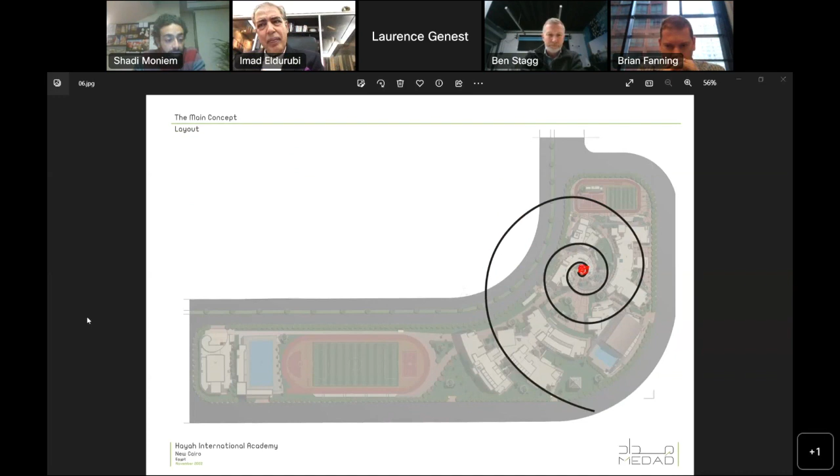So this is the volute, and on the eye here we put the theater of the KG stage. This is the start of the process of teaching and learning in the theater of the KG building, as it's an outdoor space, very intimate and open to the sky, to say that the limit is the sky.

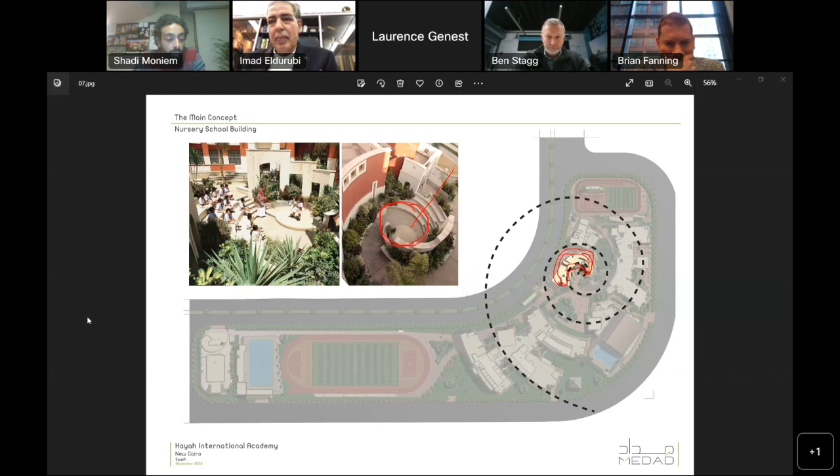Then we put the KG building here in the middle, next to the eye. Then we go through the journey, we put the elementary building here. Then when we go further than the eye, we put the mid and high school building here.

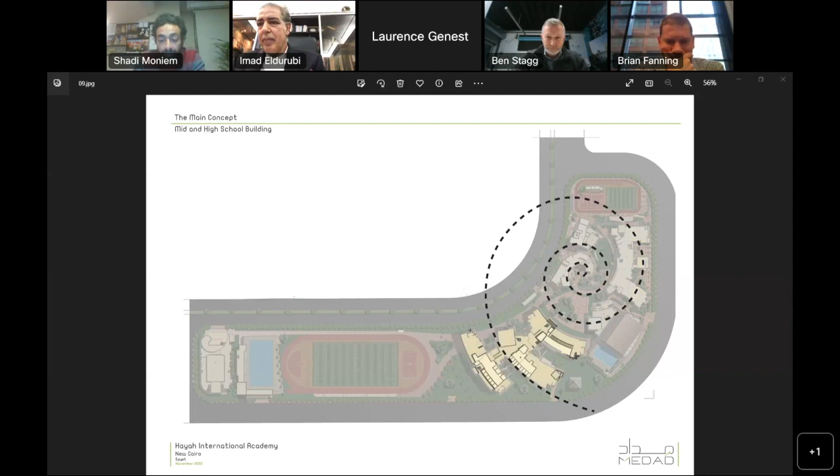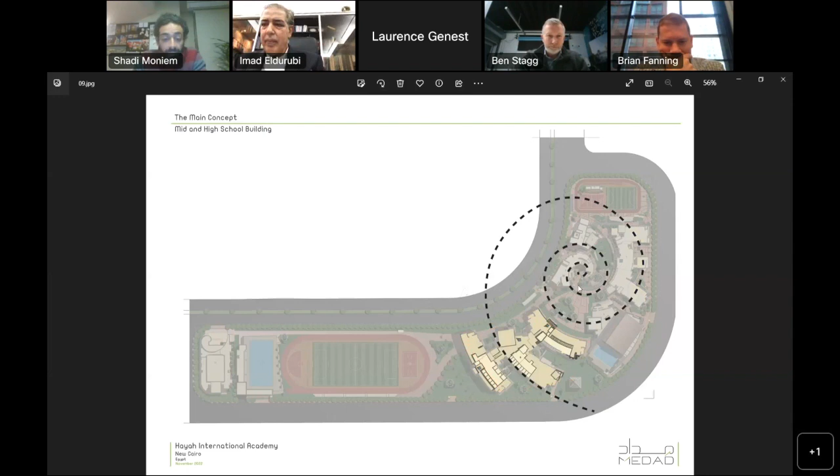So that was the main concept that we used here. And then when we talk about the codes, the buildings itself will face the rules and the items that we need to respect and follow.

There are a lot of codes here in Egypt to follow: the firefighting code, the special needs code, the car parking code, and more. But we chose the firefighting code as it will affect the building the most, it has the bigger effect.

Here are some of the items that we need to follow and respect. When we talk about the firefighting code, we need to know the function of the building we are designing as we go through the design process. In this case, it's simply an occupancy group under the subgroup schools and colleges. This is a very important piece of information we need to know, because it will affect the other data we need to know in the code.

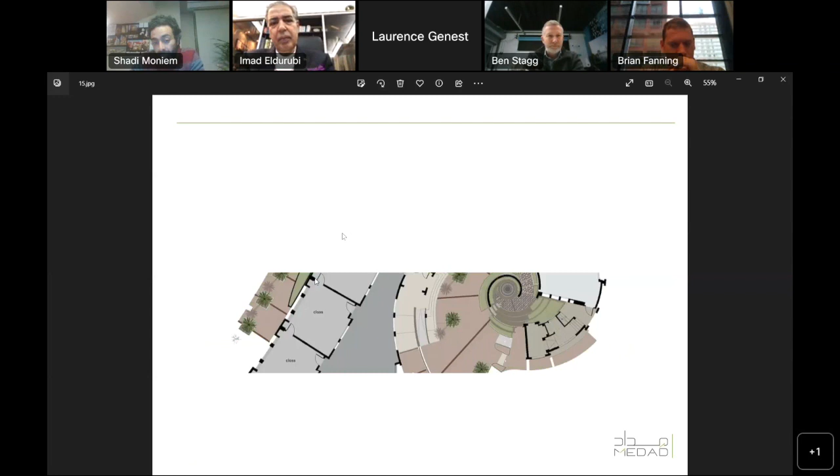So when we applied it, we designed the nursery ground floor building. This is the ground floor of the nursery building, and as we see, it's complying with the main concept.

We don't forget the main concept - the main concept is the volute. Why the volute? Because it represents the growing process of the journey that the kids go through as they go through the journey of learning.

So here is the theater I talked about, and this is the building of the nursery, and it's respecting the curves of the volute here, which is why the curves here are harder than the curves in the other buildings.

And we put the 2 exits we need here and here, and they apply with the function, they apply with the main concept. They are not odd or out of place - nothing is ugly or anything like that.

This is the ground floor, and we can see it also on the first floor here. The distance between the two exits didn't exceed the 100 meters travel distance we talked about, so there is no place in the building more than 50 meters away from the exits.

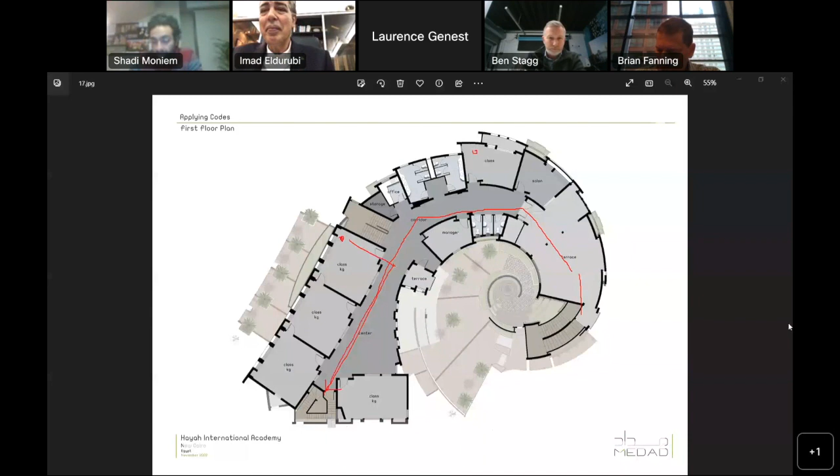And we put them at the end of the building, so they cover the whole building with no problem. We also placed them in locations that don't affect the elevations and the north-facing side, because this is a school, so we need most of the classrooms directed to the north.

So when we chose the placement on the plan, we didn't affect any of the function or the main concept.

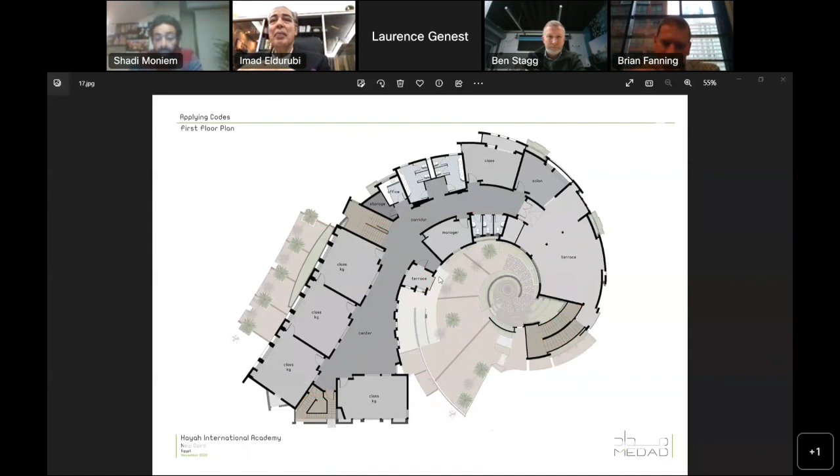This is the stair we are talking about. And when we are dealing with the stair, we are dealing also with the masses of this stair. It's not just a stair, it's a feature. It's a mass.

We can put a lot of elements and make it an identity for the building. Every stair of the different buildings, we are dealing with it as its own identity for that building. So even if the kids are seeing this element, they know that this is for their building.

And for the other building, we are dealing with the masses with other elements. So it's different, but homogeneous with the masses of the whole school.

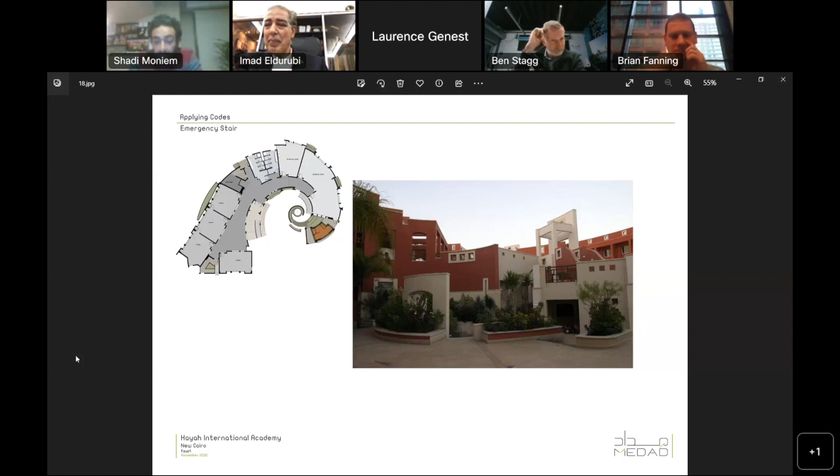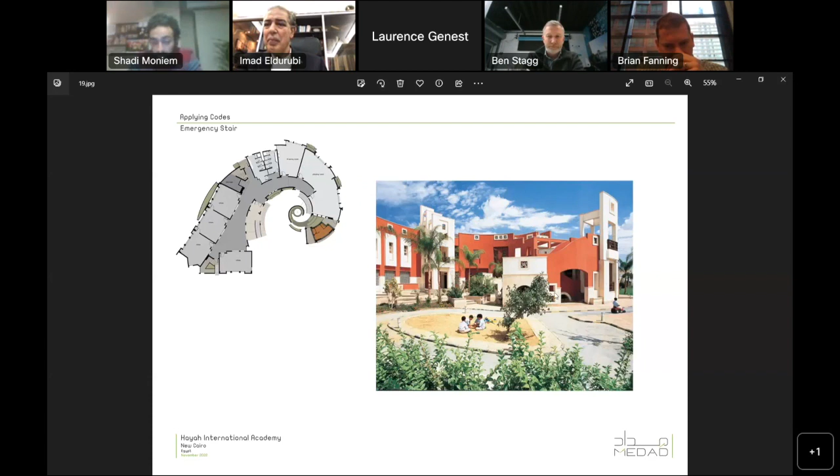So here we can find a picture for the stair that we are talking about. Here is another shot for it from the real course, and this is the other one.

So we can see that the stair is not just an element we need to enforce in the building, or enforce in the plan or in the mass. We deal with it as a beautiful element we need to express a lot of things with.

And that's it for me. I hope that was doing well with all the people here. And thank you for this opportunity again.

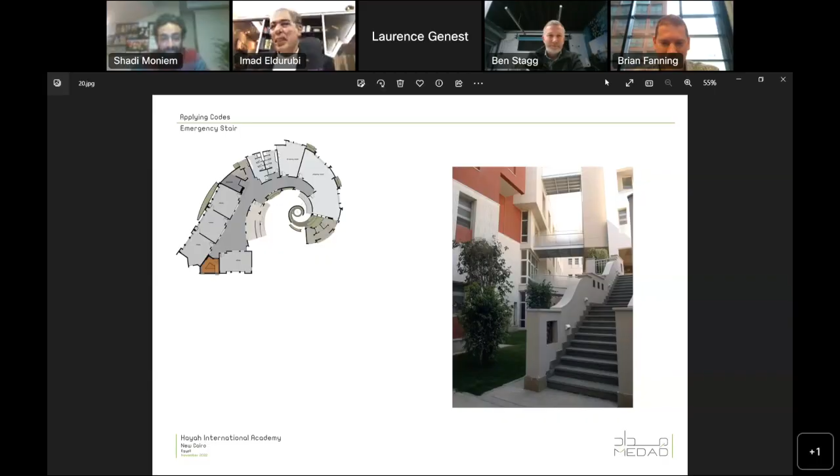Thank you, Architect Shadi, for shedding some light on the Hayah Academy. I believe there is going to be another campus on the other side of Cairo. This one was built in the Tagammo, the fifth settlement, but I think you're working on a different project across on the other side of the Tagammo, is that it? Yeah, yes, we were doing a lot of other projects, educational and retail and administrative buildings, alhamdulillah.

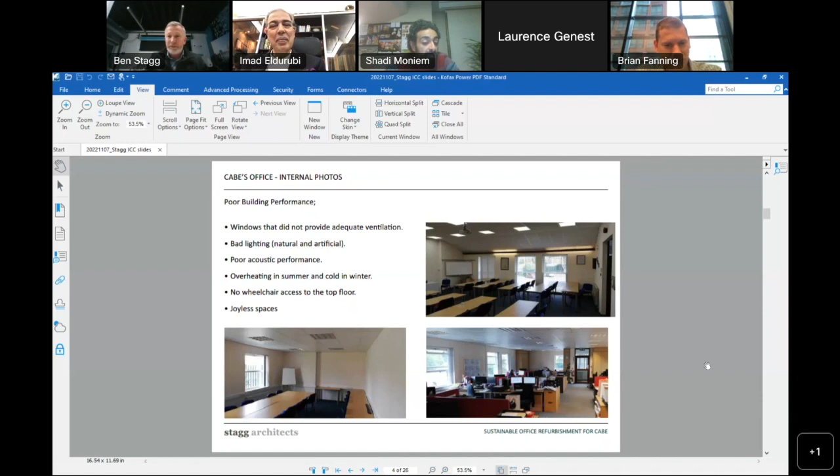If you look inside, the windows had been replaced once in its lifetime, but were of very poor quality. People simply couldn't open them, and they were drafty. The lighting quality and colour temperature was very bad, with flickering lights, which made it uncomfortable. The acoustic performance was very bad, with a lot of reverberation, making many spaces uncomfortable. It suffered from overheating in summer, very cold in winter. There was no wheelchair access to half the building because there was no lift. It was just a very joyless building that hadn't had much love given to it over the years.

The brief from CABE to us was to improve on its compliance under the building regulations. As an existing building, they weren't obliged by the building regulations to do a lot to it, but they were keen to go beyond their minimum standard and really be exemplary in terms of implementing best practice, so they could demonstrate to others that they were doing this too.

So we were looking to focus on improving comfort through better ventilation, heating, cooling, lighting and access. They also wanted this to be an exemplar sustainable project, embodying important principles of retain, reuse and recycle. It needed to be a welcoming place for staff and visitors, and of course, everything had to be done to a very tight budget, since they're an industry organisation that needed to demonstrate to their members they're spending money sensibly.

So the key moves we made in the building - this is a cut through of the ground floor. We introduced a new lift shaft to give access to the first floor. We carried out some opening up work, structural alterations to the reception and lounge area, which was previously a very cellular layout, making it rather unwelcoming. So we opened that up so the spaces flowed through.

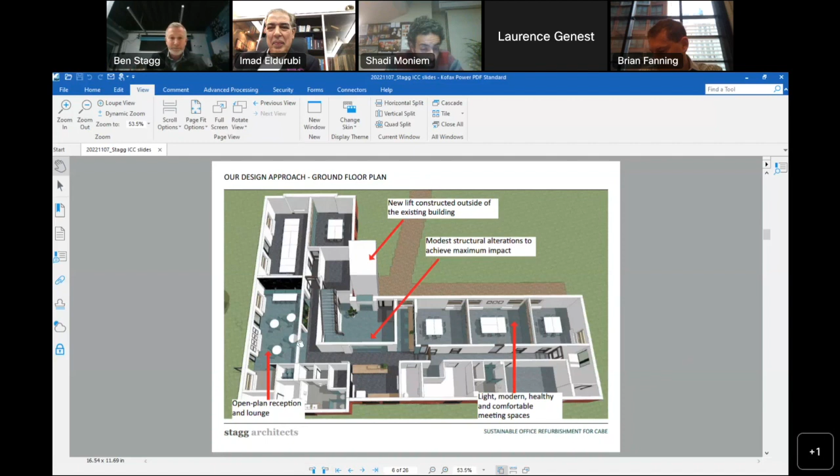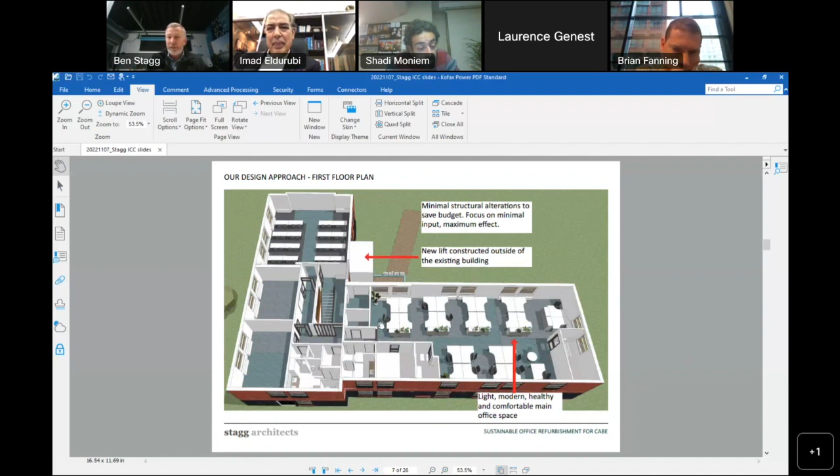But these were modest alterations because budget was always a key consideration. On the first floor, there were very few structural alterations - some were needed where the lift comes up in order to get access throughout the building. Otherwise, it was very much a case of improving comfort for the people working there.

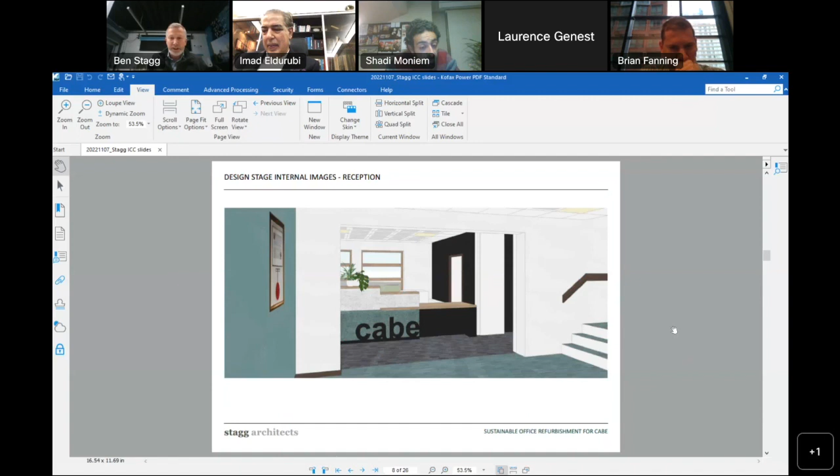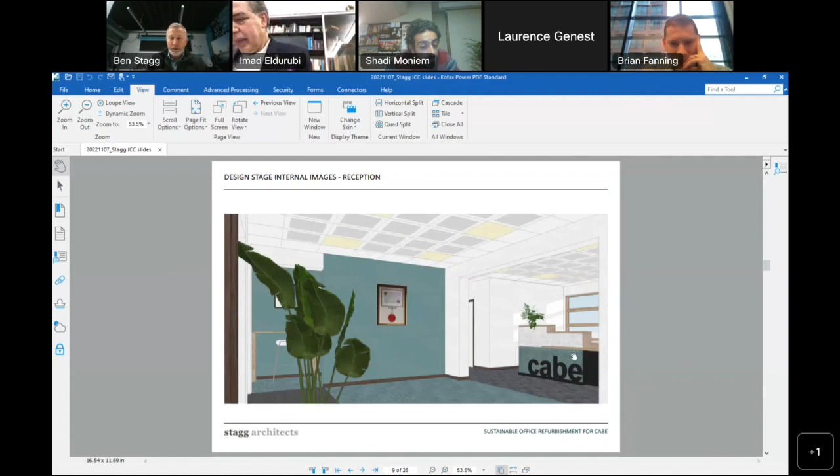I'll take you through quickly some visual illustrations we produced at the design stage, just giving the client a simple understanding of what we were doing. So this is the reception area - opening up on the right, you can see through here. Previously, this was all closed off into rooms.

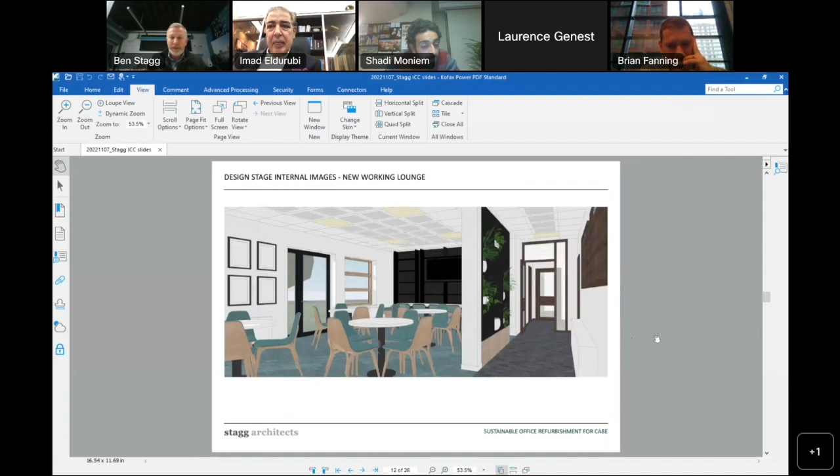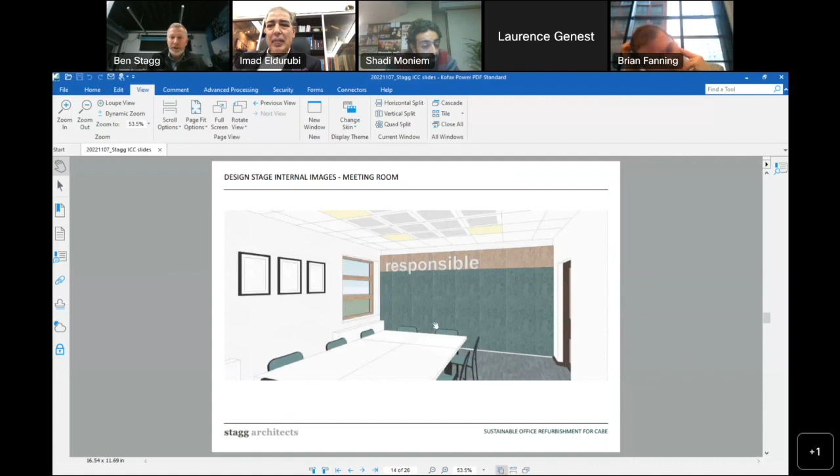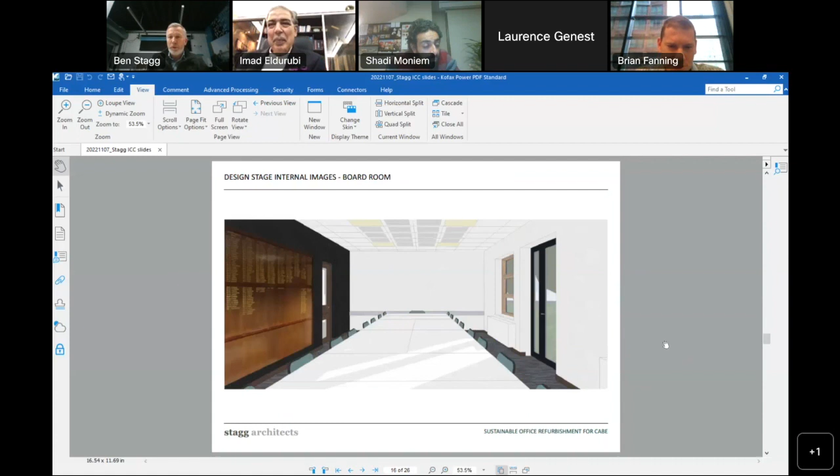Looking through into the lounge space, which would then open out into a small garden, trying to introduce plants etc. to make the place more pleasant. A new coffee bar, meeting rooms with acoustic sound absorbent paneling, and this would be the main office space upstairs, and this is the boardroom. Very much working with what we've got, but trying to use minimum means for maximum impact.

In terms of building regulations, there's two routes you can go down in the UK - you either use an independent approved inspector, or you use the local authority, and you can choose which one you do. In this instance, we went with an approved inspector.

It works by you submitting your plans to them at the design stage. They undertake a plans check and tell you whether the design is in compliance. Then they visit site during the construction works to sign it off at key intervals and ask for additional information as the project is built.

Compliance was straightforward, and in terms of the building regulations it was an easy one because CABE wanted to exceed those minimum requirements on pretty much everything. The next page explains the key parts of the approved documents that related to this project.

So: structure, fire, ventilation, combustion appliances, because we did some work to the boiler. Thermal performance was very important, Part L, in terms of the upgrades we made. Accessibility through the new lift, and Part P for the new electrics. In the UK there's a suite of approved documents from A through to S now, each with a different area of focus, and these were the ones relevant to CABE's project.

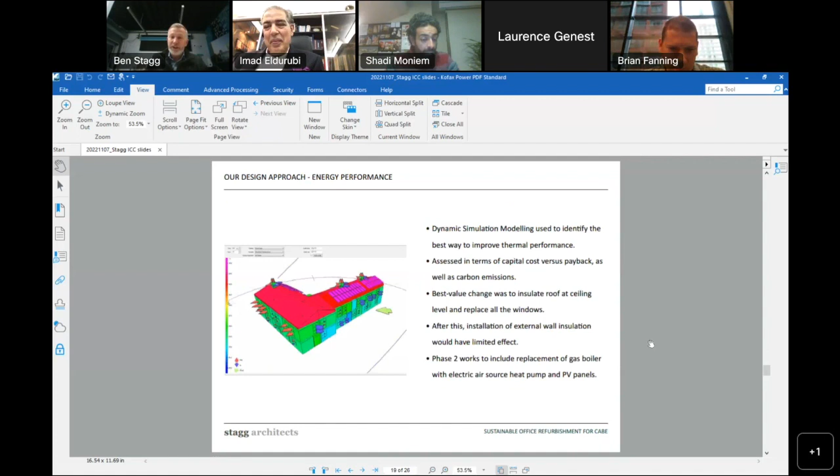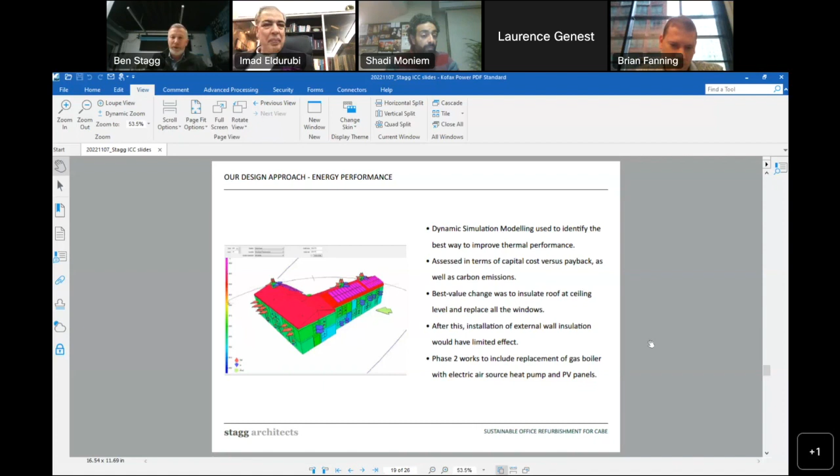A key part of this was Part L, about the energy performance of the building. We undertook thermal modelling to see what measures would have the greatest impact, primarily insulating the ceiling to stop overheating and losing heat through the roof, and changing the windows. Those two things, even without any wall insulation, had the biggest impact in terms of energy and carbon savings per pound spent. So that's what we embarked upon.

New windows throughout the building. Putting new windows in is a real win-win because they do so many things: better thermal performance straight away, better air tightness, fully controllable openings and trickle ventilation so users were happy to open and close them as much or as little as needed. You get better daylight, and you can coat them, so we reduced overheating in summer with reflective glazing on the south and west sides. And of course you get a much nicer appearance. The windows were a big part of the project.

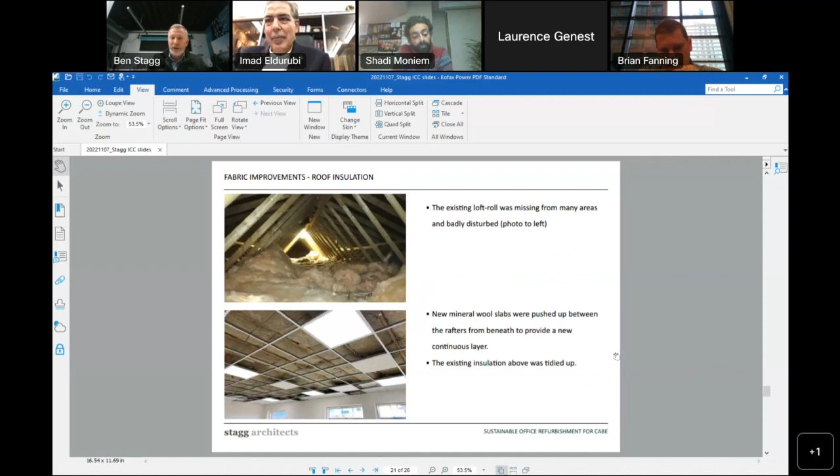The other big issue was that although the ceiling had some thermal insulation in, it was very poorly installed, which I think is a problem in a lot of buildings of this type. The photo at the top shows how the insulation had been disturbed so it wasn't providing a continuous layer. The photo at the bottom shows what was done, where additional mineral wool was added between the rafters - a very simple solution but with really high impact.

The key message I'd like to convey is how hard we worked with the client to avoid throwing things away and buying new things. It was very much about: can we keep it, can we retain it, can we upcycle, can we upgrade it, can we use it again. The result is you don't end up with a building that looks brand new, but one with a lot of character, a slightly unusual aesthetic if you like.

But to achieve that you need a client who understands that's what they'll get, and a contractor prepared to spend the time. Contractors love to just buy new, so getting them to understand that cultural change, to work hard with existing materials, matters. For example, the bookshelves here were all upgraded from things that ordinarily would have been thrown away.

I'll probably stop there as I've run over my target of 10 minutes. I'll finish by saying we costed the project and it came out at £685 a square metre, which, considering full new services throughout, new windows throughout, structural improvements, a new lift etc., I think was extremely good value for the client. So I'll stop there - thank you, and back to you, Imad.

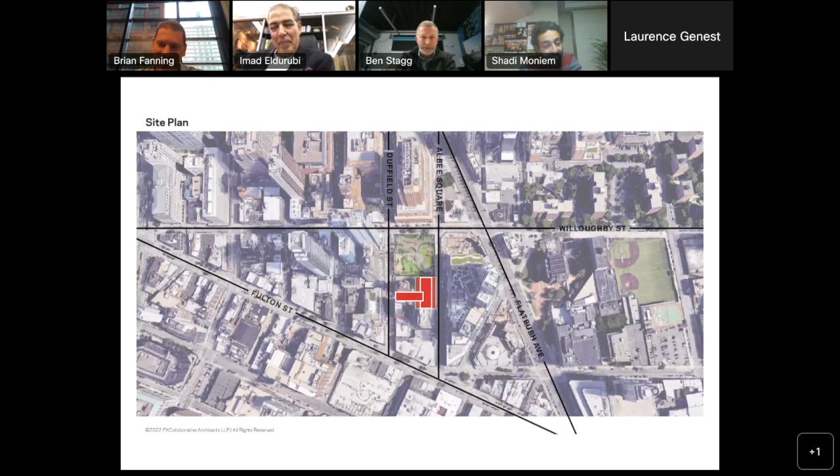I forgot to mention, I'm going to run very quickly through the big design concept, and then the code and building department influences that also affected how it developed. So it was about creating this iconic workplace, really about creating a place that would attract the Brooklyn creative class. I'd say generally Brooklyn is seen as where a lot more of those creative type people like to live, so the idea was: let's create an office building for companies that want to attract them.

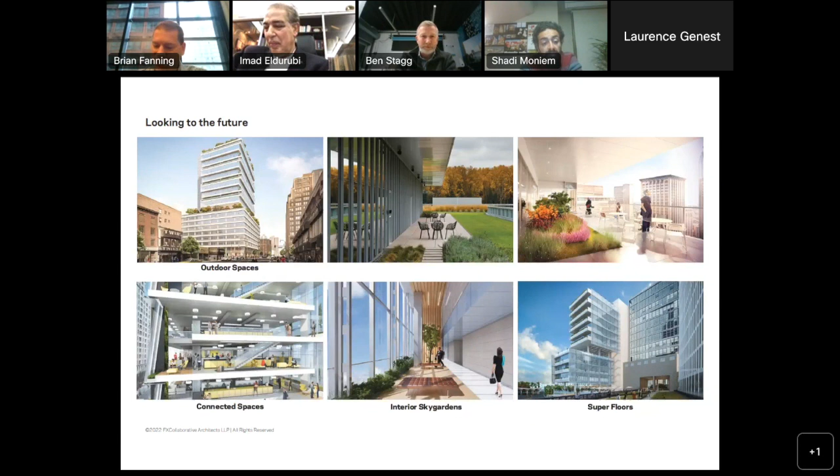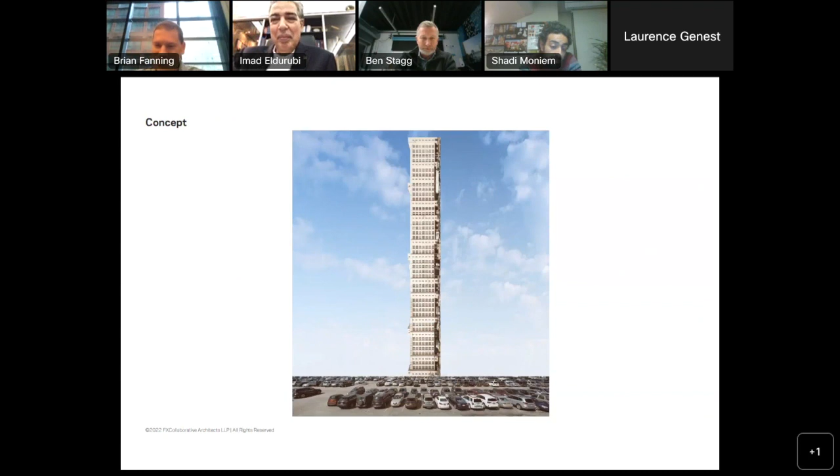So the big picture concept was taking this sort of iconic ground scraper of an industrial building, flipping it vertical, and inserting green open outdoor spaces into it. And then in terms of developing the massing, we had this T-shaped site.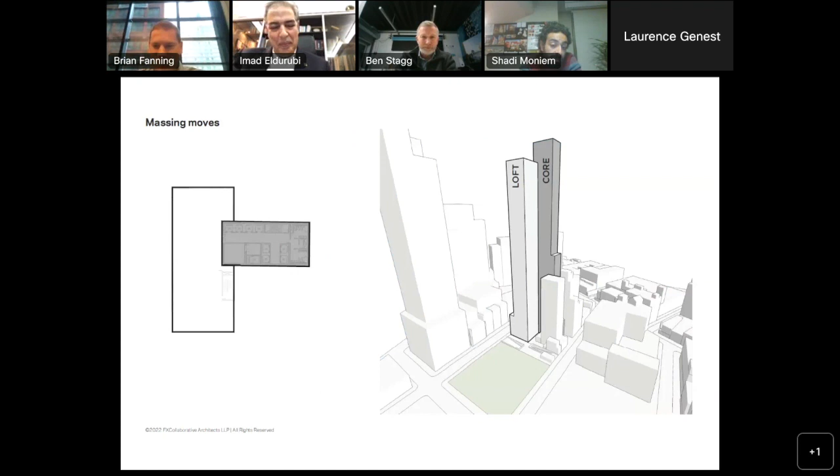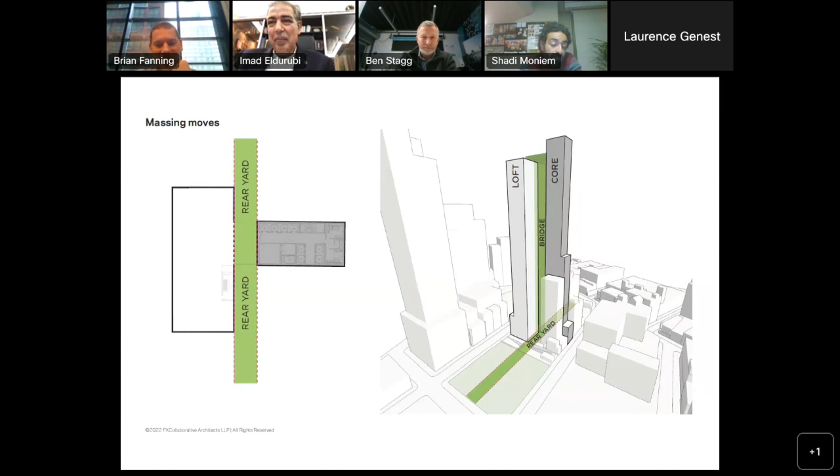So the idea was, let's create this beautiful open loft and try to compress all of our core elements into the stem of the T of the site. And then we pulled that apart, which allowed for this openness that connected to the rear yards that run down the block per New York City zoning, and also allowed for this connection to the park, both visually and a literal outdoor connection.

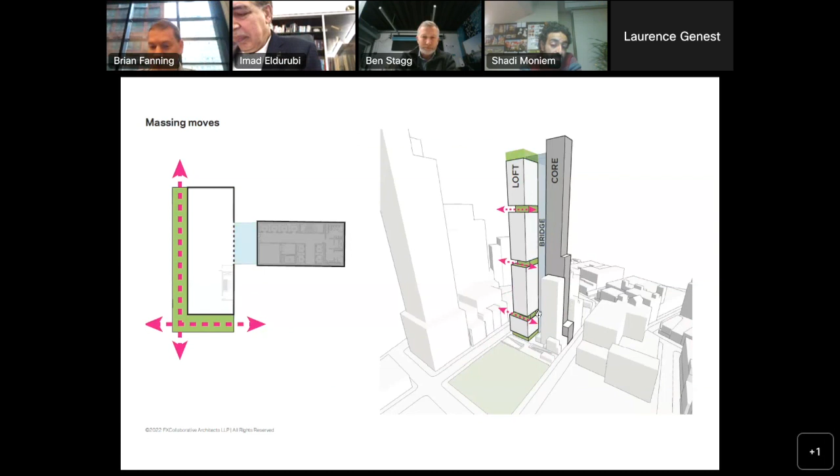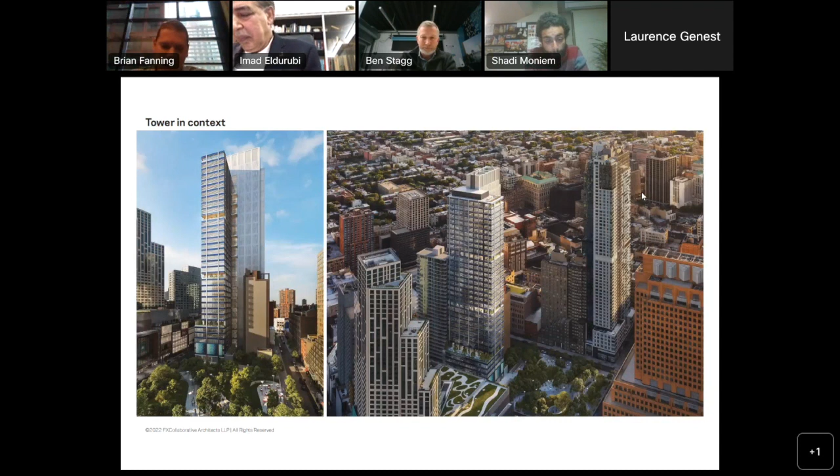You'll see there's a lot of balconies in this area in the development of the building. Then we inserted these cutouts that broke up the volume, but also created additional outdoor space and anchors for the building, whether it's for a tenant that has multiple floors or whether it's a building-wide amenity. So ultimately, this is the look that developed from that. I think it really did carry through a lot of that intent.

Let's keep going. So in the plan form, you can see we kept most of that vision. Open loft, this is a high-rise plan, so the core elements are a little smaller, the core, and then the open bridge. And you'll see the core does spill a little further out, and we'll go through some of the reasons why.

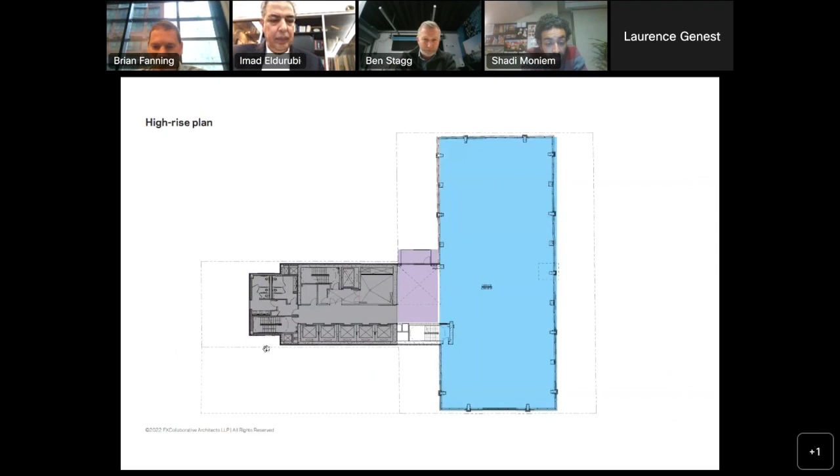Code-wise, it was also just kind of a structural necessity, but I feel we did keep a lot of that vision. So this is an early rendering that kind of gives that clear open feel of that bridge element. And with the goal of getting an open space on every floor, it didn't fully translate through, but a lot of these ideas of connectivity did.

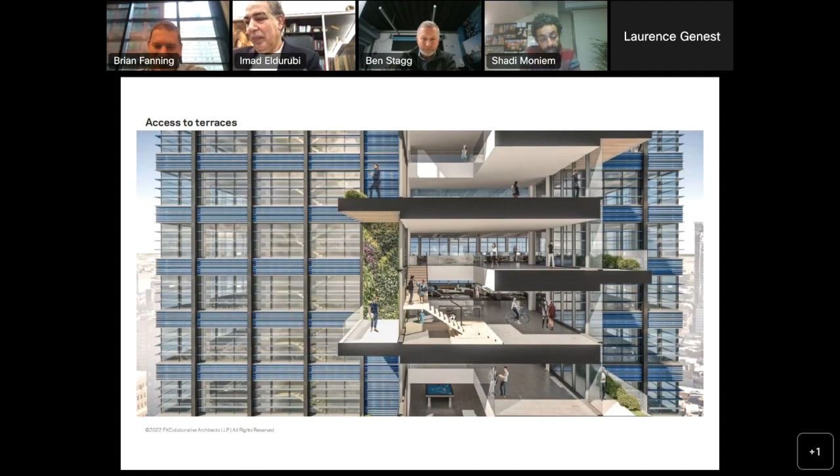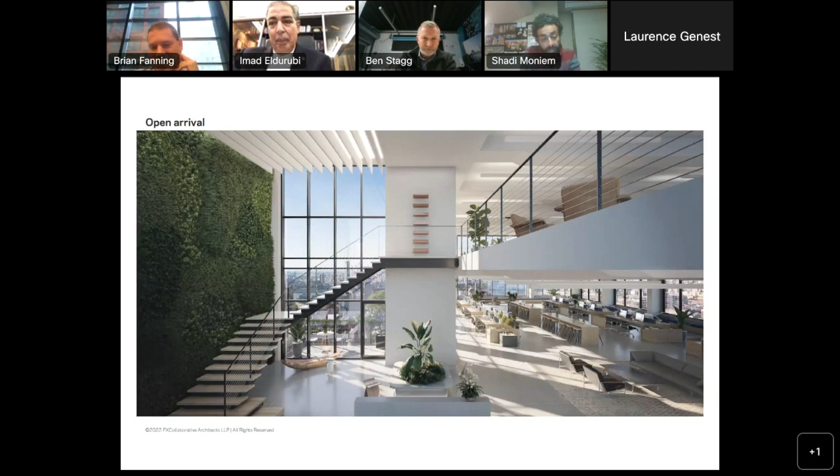This is in that bridge area, there were a lot of these multi-story connections. That's important to, if you're having a multi-floor office, really trying to keep that connection between the occupants on the multiple floors. This was kind of, again, an early rendering, just showing in one quick picture what these office spaces can be.

So the vision of the outside of the building, again, thinking how do we take this industrial heritage, a lot of the rich masonry buildings in the area, and translate it. We looked at kind of the factory divided light windows, but reinterpreted them. That's actually glass between the two spandrels, one piece, and then those are sunshades floating free, but it does sort of harken back to that look of the divided lights.

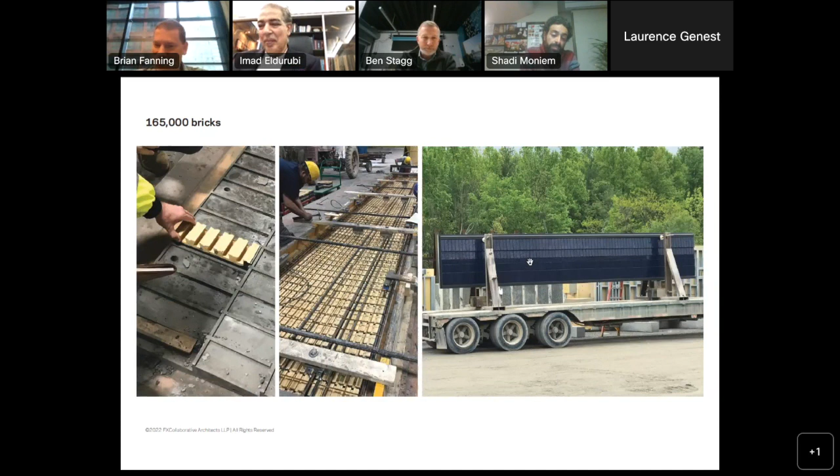And then you had the glazed brick spandrels, and you have the vertical metal piers. And those glazed spandrels, we looked at terracotta, we looked at brick. After many costing and constructability studies, we ended up doing a glazed brick set in a precast panel. It allowed for a lot of very nice coursing expression that would have been a lot of difficult masonry work on site. You can get a feel for how this all came together in these construction photos.

This is the look of the overall building. And then this gives you a little idea of the detail, and hopefully you can see here a lot of care went into determining all the special brick shapes. A lot of time went into the selection of the color and texture that really allows the building to react to the atmosphere, the weather, the light at the time.

And then I'll go very quickly through this to save time, but we're lucky enough to have our office in the building. It's, I think it may be the first LEED Platinum version 4 office space in the country, which we're very proud of. But I'll just zoom through this, and you can see some of those elements we just talked about, how it was actually put into the first office in the building.

These are the kind of common areas, and that tall super floor, that's the 7th floor. These are the working areas. And this is not even the full span, because we had a lot of conference rooms and things. We're only using about two-thirds of that span. So hopefully that gives you a good feel for the overall design.

So now I wanted to cover how some of these goals were also influenced by some of these building department and code influences. So this is now a low-rise plan. It looks familiar, but you can see the core spills over a little more. And there were a lot of code issues, obviously, driving the core.

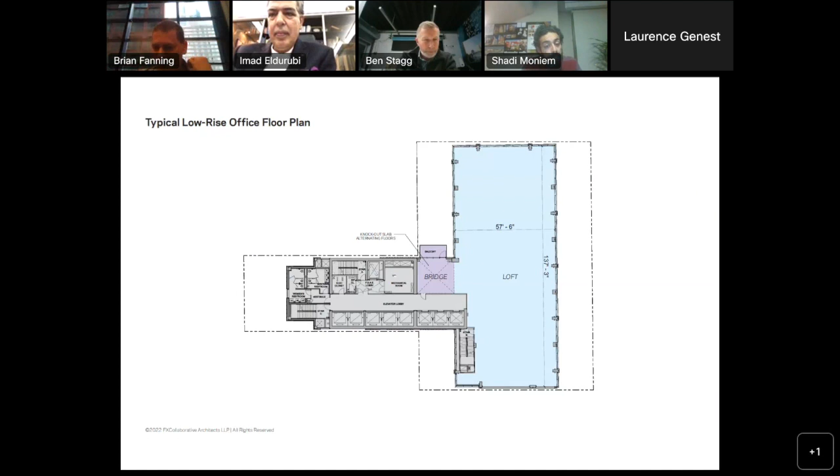One of them is this 3rd stair. So in New York City, post 9/11, a rule came into effect that if your building's over 420 feet and not residential, you need an additional stair.

So this meant we were looking at a few options. One was, what if we just keep it under 420 feet? That didn't really meet the client's goals. It made the floor-to-floor heights too tight—really a little too compressed to work the way that was wanted.

We looked at this exception under the code for an occupant egress elevator, but at the time it was under design. There just wasn't a comfort level that any elevator manufacturer could truly meet all of the requirements laid out in the code. So the owner didn't want to take that risk to totally be reliant on it being ready in time.

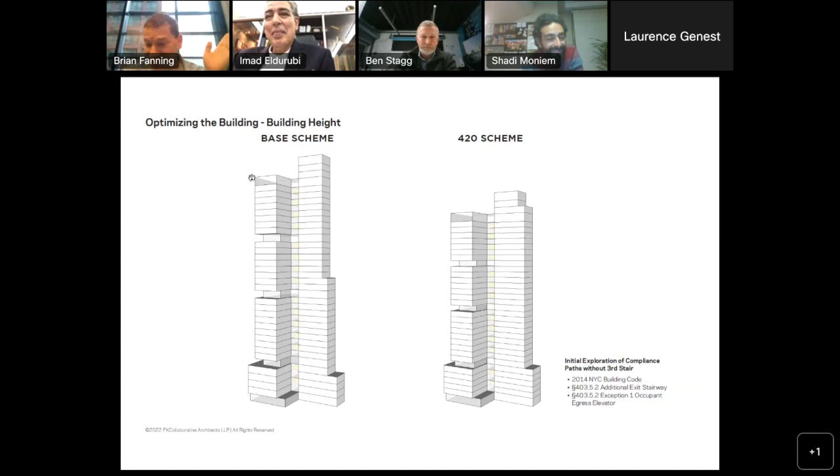So we did then proceed with the additional stair, which meant a lot of the more typical regulations affected how we designed the building—issues like the remoteness of the stairway enclosures, the separation of the stairway doors, the overall travel distance, and the common path of egress travel. It all was very workable in our design.

The one issue that did come up that we have to be aware of is because the core is all kind of pushed that one way. If you look at multi-tenant scenarios, how we could divide up this floor between multiple tenants, you just have to be careful that you don't bottleneck people and have an issue with that common path of egress travel.

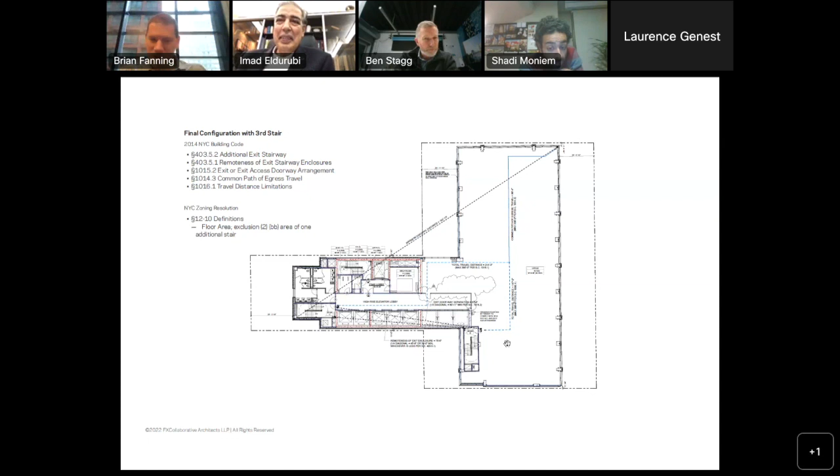One other accommodation in the New York City zoning resolution that made the third stair a little more palatable to the owner is the fact that if you do have to implement it, you're allowed to deduct the area of it—which is very important because then they can put all their zoning area in the same way they would have in a building with two stairs. So that allows us this open loft feel by keeping that core all on that side.

One other important element of the open loft was the idea that these creative companies are probably interested in a slightly more industrial look, with open ceilings and slightly less finished spaces. In New York City, the default for an office building is to do a steel building with a concrete core. In this case, knowing it would be exposed, there's the concern that fireproofed steel with spray-on fireproofing is not very attractive to leave exposed.

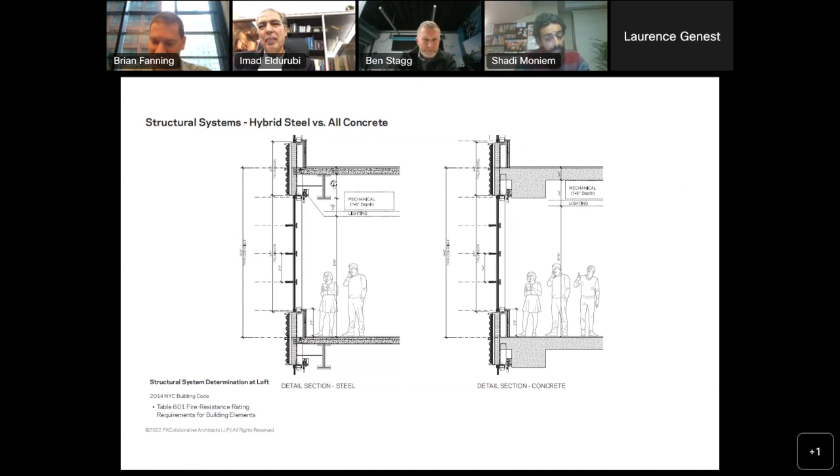So we explored a lot of concrete options, and in the end we landed on a solution which is really sort of a curated framed concrete structure, which was great because it can look good when you leave it exposed. Hopefully you saw that as I flipped quickly through our office photos where you can see right up to it. And it was done in a way that anticipated how the MEP could run, so that wouldn't all have to be below that.

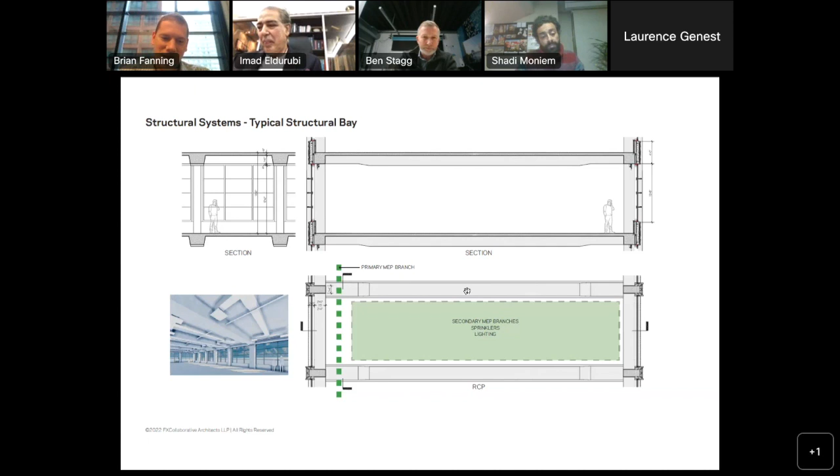It also definitely harkens back to that industrial feel of a lot of those buildings. And it allows you to really experience more of that full floor-to-floor height when you're in the space.

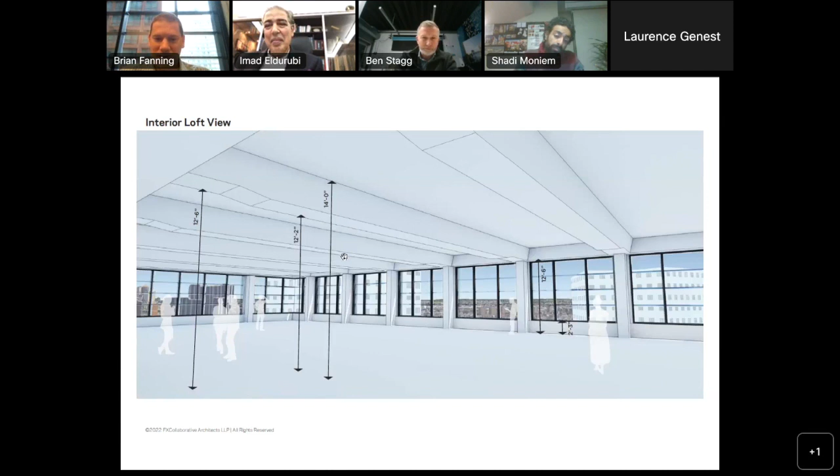So this is what it actually looks like on a vacant floor. Looks a little better once you paint it, but I think you can really see here how open this floor can be. You can see that shaping of the concrete beams, which allows you to run MEP or just pop up to the windows—even these sleeves put in for the smaller MEPs to run through. You can also zoom in and see what a view this has at the upper floors towards Manhattan, which obviously was a key feature.

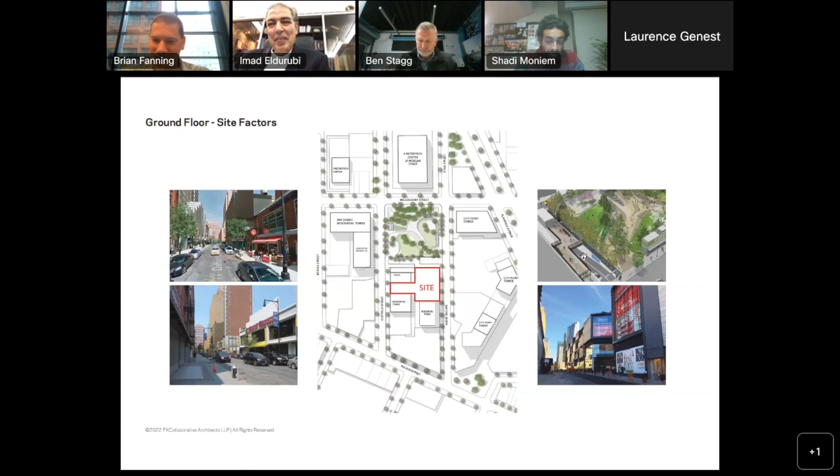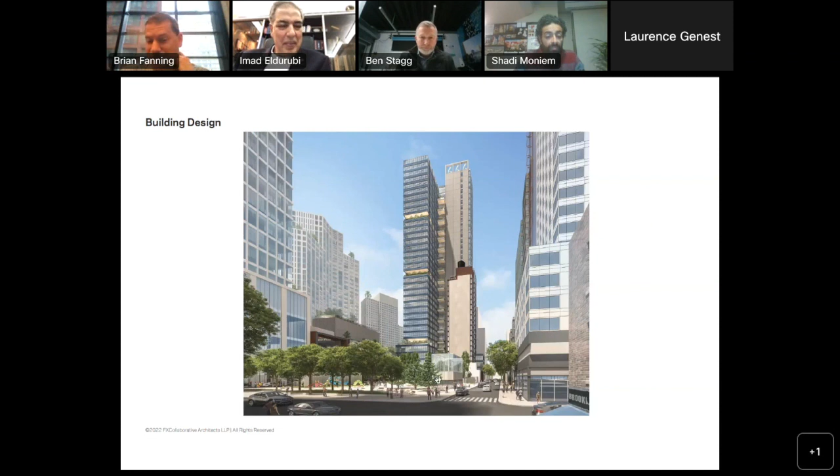One other important element to the project was this park interface. We're right next to this park—note this ramp down. At the time the building was designed, it was actually a park on top of a parking garage; in the end it's just going to be a park, which is great, but it did affect some issues. Overlooking the park, there's a desire to have that visual connection to the park, and at the ground floor, a physical connection. But that did lead to some challenges.

So before we were even involved with the project, the owner had pursued a CCD1, which is a construction code determination from the Department of Buildings, to ask: can we please consider the park an open space so we don't have to worry about these fire separations?

And that was denied, and I suspect that was because at the time it was not just a park, it was also the roof of a parking garage. So I can understand that, but it meant we had to look at those fire separation regulations.

In the table that defines those, there's a footnote that says it's further clarified by this Buildings Bulletin, with commissioner's discretionary approval you're allowed openings, but mainly that's beyond 60 feet. So what you're seeing here in this shaded zone is a solid area up to 60 feet that had to be fire rated.

No one was paying for fire rated glass here, but this is extremely exposed. So the idea was, okay, let's do some spandrel glass so it still looks like the rest of the building. But it also created an opportunity, making lemonade out of lemons, for a public art wall that could be just constructed as a simpler wall, but also give something back to the community and to the park.

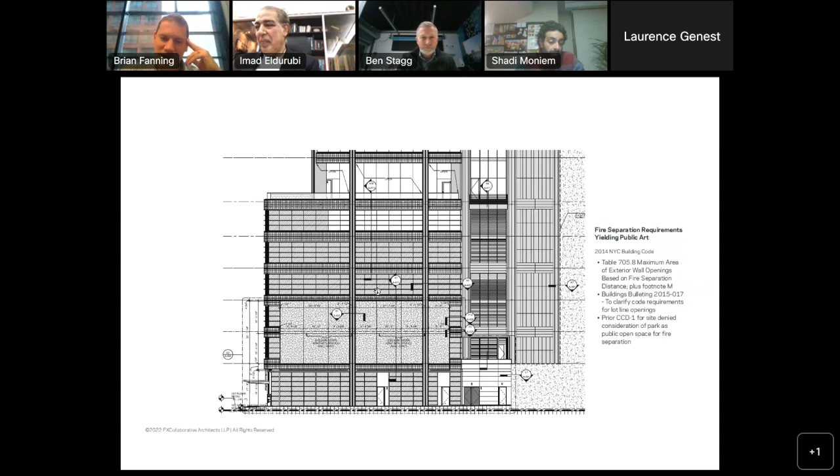So in the end, this is the location in context. An artist, Ruben 415, who goes by Tony Smoljan, painted a mural here, and it may not be his mural forever. The idea is this can change over time. And this is what the final product was like.

And this dirt here currently has a bunch of construction vehicles in it. We're hoping within a year to have a real park there.

So then the last element, this is an extremely early sketch, but one element we were able to keep was really this bicycle connectivity, that you really can get into the building in a way that doesn't feel second class with your bicycle if you're commuting into work that way.

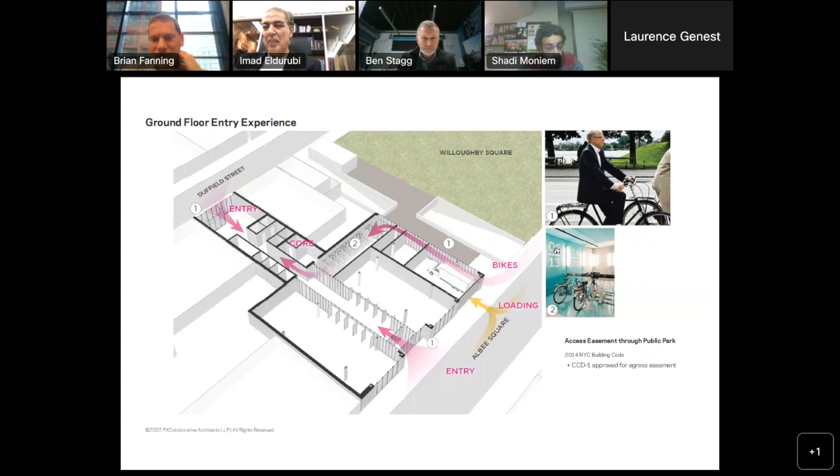So in the final iteration, you come in through the park, come into this bike entrance lobby, drop down the elevator into this bicycle room. And a very nice and important amenity to that are these 7 little private restrooms that also have showers. So if you come in and you're sweaty, you have the opportunity to freshen up before work.

But New York City zoning actually prohibits showers in commercial buildings. I believe that was due to illegal uses and conversions where commercial buildings were actually being used residentially. So there was this TPPN, a technical policy and procedure notice the building department put out that said, if you do these certain things, it might be allowable.

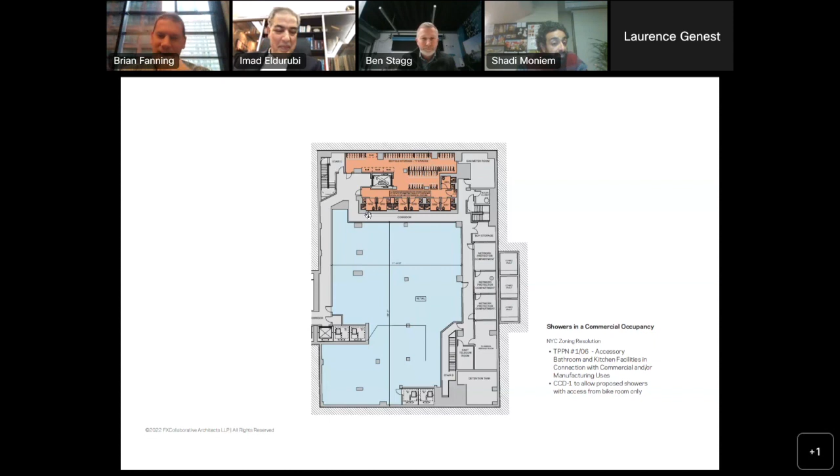So we went in with another CCD1 to allow that, and we did get it. Although this is an early rendering, you'll see it's across the hall from the bike room. We thought that separation might be nice, but they said, no, you really have to stick to the letter of that TPPN. They have to open directly into the bike room. So that's what we ended up with.

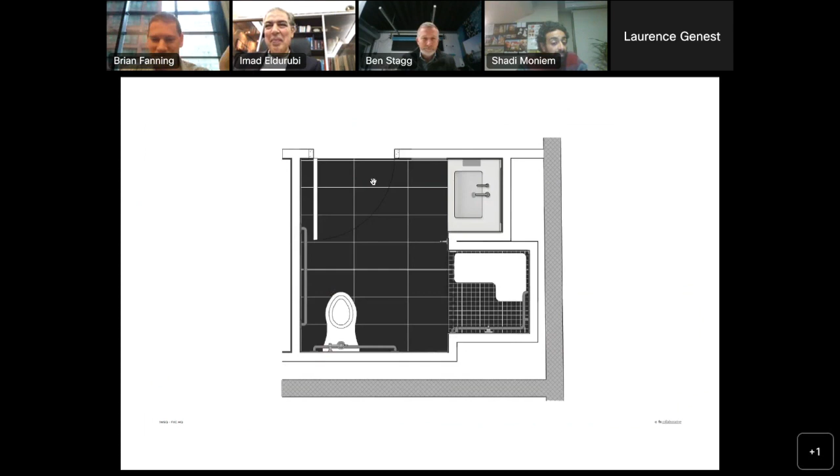So it really is this opportunity that you can commute with your bike, freshen up if you need to, and go upstairs. And it's very nice that there are these carve-outs the building department makes, that if you do these things the way they want, that avoids the concerns that led to these rules. There are ways to get things like this incorporated.

So hopefully I made that with enough time, but that was the presentation on One Willoughby. And okay, we have 5 minutes left.